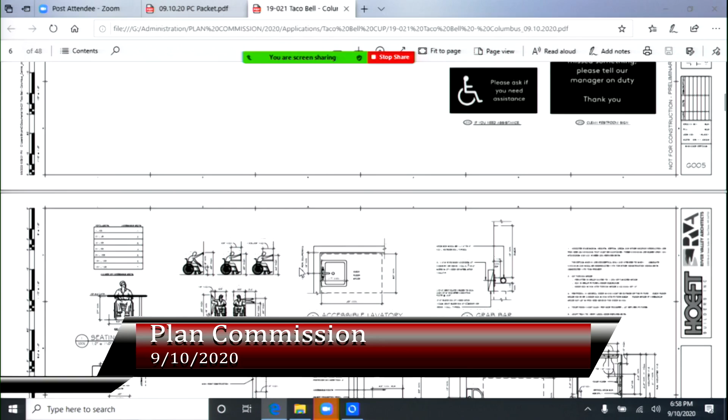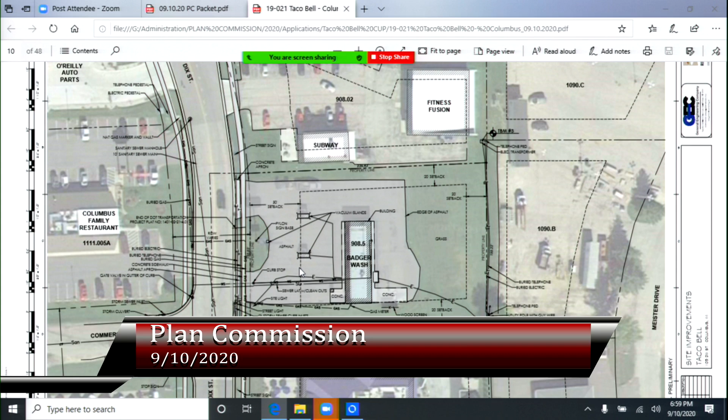There was some thought given to originally having it lined up with the family restaurant, but ultimately we figured it was best on the northern entrance, since Columbus Family Restaurant has been there, has been grandfathered, and has 3 access points. That would be something to look at if there were ever a project in there, maybe one of those access points would go away. But since they're on a corner lot, there are no issues right now. It's one of the few properties on this stretch that has 3 driveways. And the rate of ingress/egress there is different than for a drive-through type of thing. That's true.

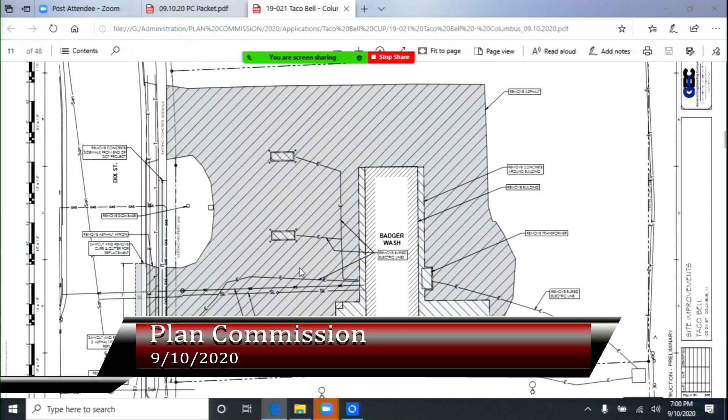This is also another current existing site. I think it shows where the utilities come in as well.

So this is the site plan that we have in front of us. You'll notice the 36s here, a right hand and a left hand out at the entrance. I've seen this kind of design more common nowadays. It shrinks it all and puts it into one driveway, but with the widths, as I said, it's 36 feet, and it's 36 at the property line.

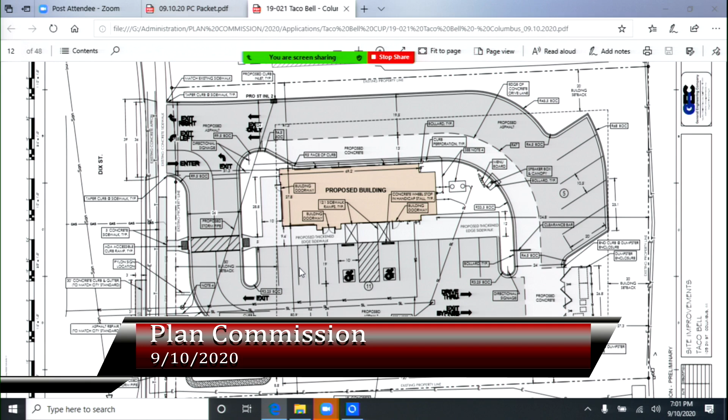The one thing to note is that Dix Street has an 80-foot right of way, so it's a little bit wider. Sorry, 70. It's wider than the normal right of way, and the property line technically doesn't start at the sidewalk, it's a little in from there.

They said there are 28 stalls, 2 of which are handicapped accessible. This meets the ADA requirements. They show their garbage refuse area in the back, and it's screened. Any questions on the site plan?

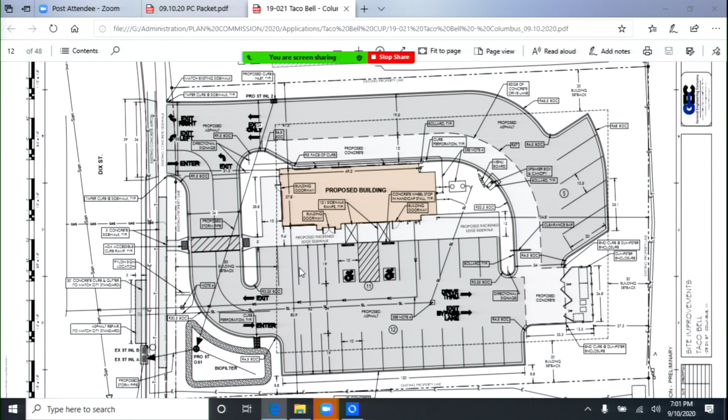They do have a dry biofilter retention area on the south side, and it's really to handle TSS and infiltration requirements, I believe. They noted that this site is small enough to get under the threshold governed by the state, since it's not an acre in size, so they don't have to address quantity, but that was addressed through the site plan review process to satisfy the city's code.

This is Brad at General Engineering. Just to clarify, even if we were over an acre, we would have to submit to the DNR and get approval, but because it's a redevelopment site, we would not necessarily have to meet infiltration or detention requirements for a redevelopment site. Right, you'd still have to meet TSS for total suspended solids removal, which we're already addressing. Yep, yep.

Matt, is there any note on here, as far as trash receptacles on the indoors and outdoors? Oh, you mean the actual trash receptacles for use of customers, like on the sidewalks? It does not show that. I don't know if that's normal to not show or what, but I was just curious.

I'll let Brian answer. Is that on one of the other pages? I've really only focused on those relevant to this conditional use, so some of the other items in the full set of plans, I haven't. On the interior, it talks about the trash receptacles, just not the exterior. I was curious.

On the exterior, we have that patio, and on sheet A900, which is the last sheet of the documents, there's a patio layout that shows the trash location, labeled T759 on that last page. So there's one out by that patio, kind of where that 10-foot mark is against the building. Thank you. What was the page number again? A900 would be the last page in all the documents.

If you don't have it, the PDF that I sent over just has a patio layout showing where the trash is, and that would be an exterior trash container. So facing Dix Street is the patio you're referring to? Yes. And is that the only exterior trash receptacle? Yeah, it's just generally shown in this area. I believe that's what they said, yes.

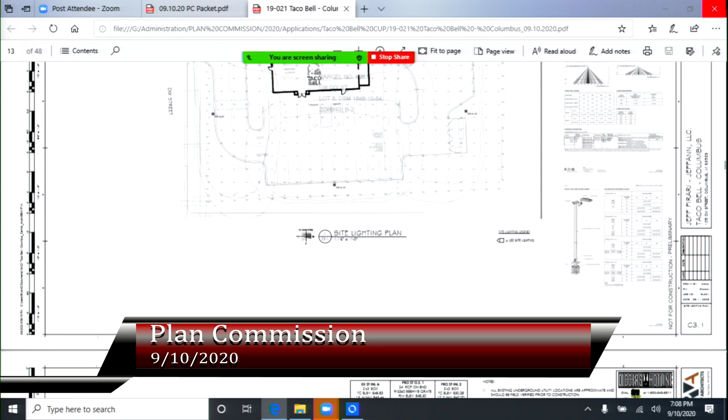I don't really have any other questions on the lighting plan.

Hey Matt, this is Brad Baston. On the lighting plan, if you guys are gonna look at shifting those a little bit, I would encourage you to look at the pedestrian conflict point at the road, just as the light seems to drop off from the inside corner, and the actual crosswalk seems to be fairly dark. So I'd encourage them to look at making sure that conflict point with the pedestrians is looked at carefully.

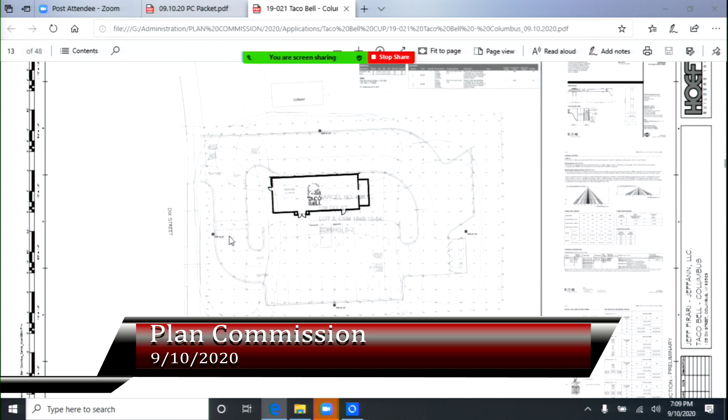Gotcha. Well, I think that was part of the reason why Jason wanted to see better lighting at that intersection as well, was the pedestrian. Right, it's far more important there than the north side of the building, or whatever.

I forget which side is north. The up side of the building. Yeah, it's much more important, that conflict point where the pedestrians are. It's noted, thank you.

All right, any other questions on the lighting plan? The next... that's not what I want.

This is the grading plan for the project right here. This is one that, looking at Jason's comments, I believe they have addressed. This is one where I think I'll have to defer to his comments and follow up with Jason to make sure that they've addressed items 1 through 8 in his letter dated September 1st.

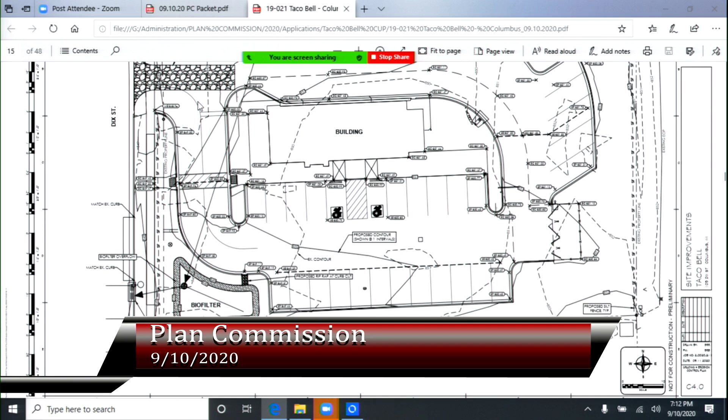I guess, Bryant, you can, if you want, talk a little bit about addressing these comments, or Brad. Sure, I can, and unfortunately when you're on the screen I can't see the comments. I have them up as a PDF, but I can't see them while sharing. You want to just go through them quickly? Oh, there they are, okay. No, I'll bring them up. I should have printed them, I'm sorry. No, it's okay.

So it's sheet C4.0 - the 6-inch diameter under drain in the bioretention, that's that line that comes out of the circle, out of the manhole, diagonally across the biofilter. You see the manhole, the one that goes kind of down and to the right? That's the 6-inch biofilter, and it's called out on the utility plan as a 6-inch ADS storm pipe. I think that issue was addressed.

Existing inlet on Dix - there's actually two inlets next to each other there, and we kind of confirmed again on the utility drawing, we have the pipe size, the invert elevation for existing inlet A, so we've kind of done that. There is a power pole nearby there, so I think we're not going to hit it, but we're not going to be very deep either - inlet A is only 3 feet deep. I just think the contractors that are digging may have to have some power company there kind of holding the poles because they're going to be right next to it, but we're only going to be 3 feet.

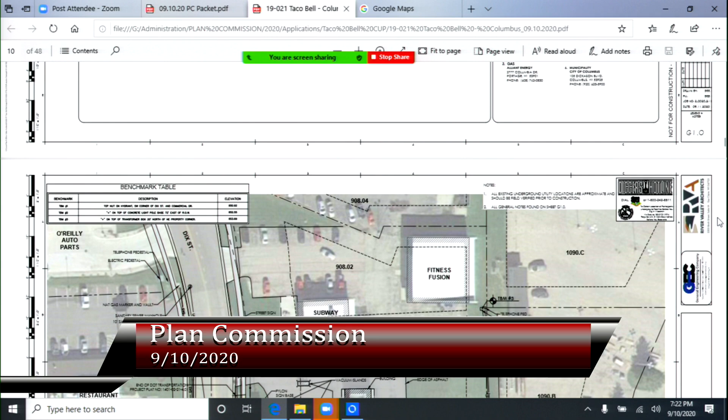So can the city make more requests in this regard? We could. Generally speaking, though, our code - some communities, and we're looking at it for when we update our zoning code, they have a point system to award for landscaping, to create a clearer way to evaluate what amount of landscaping is needed for a project, but we really don't have that. It ends up being a lot of times staff discretion. So with that, what did you have in mind?

My thought would be to plant shade trees, at least between Culver's and the Taco Bell on that line, to break up that sea of pavement. I know there would be a grass border, but there's nothing that breaks that up, so it starts to look more busy, whereas if they're broken up by a row of shade trees, I think that would make the area look nicer. You could have the same argument on the north side, but it's much tighter. On the south side, a row of shade trees looks nice and would provide shade for parking on that side, which a lot of people appreciate if they're eating in their cars or stopping. So it would be an advantage to the site, as well as enhance the view as you drive down the road - not just pavement all over, but more breakup with some natural features.

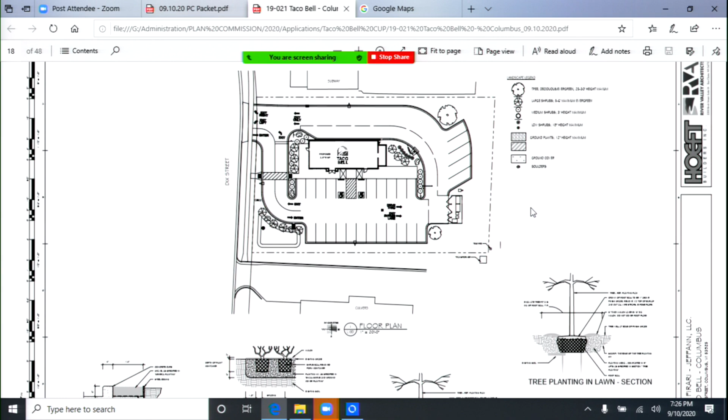Okay. Thank you, Matt. No problem.

Matt, were there any other plan sheets you wanted to share with us? Those were the ones applicable to the conditional use permit and that process.

Okay, committee members, I know we've made some comments on sheets as we went along. I'd like to make a couple of comments and then throw it back open to everybody. Number one, kind of getting off the plans, I'm pretty well satisfied that's been handled well by staff.

I noticed the difference in the plan of operation in the staff report versus what was written on their operation plan, and you said that is going to be modified. Yeah, after I got the plan of operation it didn't seem to add up, so I emailed Bryant and asked for clarification, and they gave it to me.

I'm going to back up and make a general statement. The reason this is here for conditional use is because it is a drive-through. So I appreciate everybody's comments, but I want to remind everybody that's really the primary reason. So things like traffic, drive-through places generating trash, things like that - as we think of our comments, let's keep focused on that particular aspect.

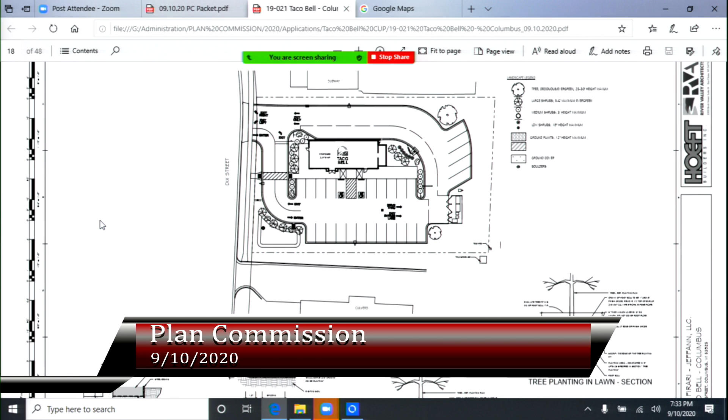It's the 10th line, it says operation of a fast food restaurant with a drive-through facility with outdoor display of vehicles for sale on the property. That's a little confusing. That would be because it was the template from Gates Automotive that I totally missed. So yeah, that should be struck. Nice catch. This was boilerplate that I'm going to be using in the future.

So thank you, because I could have recorded that. I would agree to strike that. Hopefully somebody would have caught that before it would have been recorded. But it's a team effort. Boilerplate stuff does save us the cost of having Paul redraft this every time. I'm going to have Paul review it before it gets recorded though.

Any other comments? Maybe this isn't even related, off topic, but what are the side yard setbacks and the back setback? It seems really tight, and I know Subway's tight, but what are the side setbacks? For parking lots included, you can be 5 feet off. The side and the rear are fine. The front yard setback in this district is 50, and they're 51, I think. So the setbacks are fine for this project.

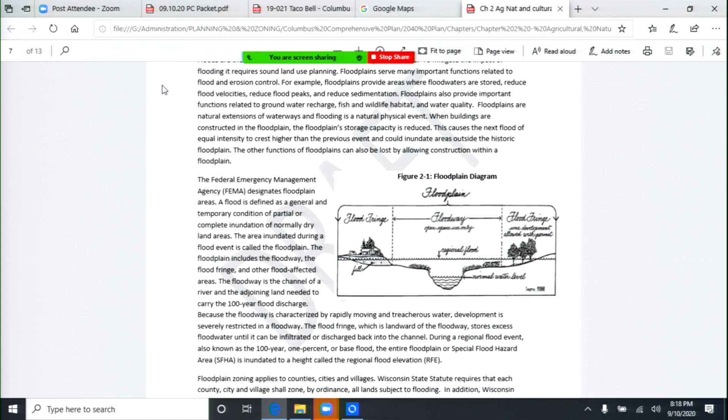It's something, obviously, in our community with the impact of FEMA and floodplain, that we really need to be cognizant of. At any point, if you have questions, feel free to stop me. Otherwise I'm just going to ramble through this.

Wetlands - here's some more information about wetlands provided through the DNR.

The threatened and endangered species - when you go onto the Natural Heritage Inventory database through DNR, you can find the local endangered, threatened, or special concern species at the town level. By town, technically it's the township range under the public land survey system, which happens to coincide with the town of Elba and the town of Columbus. They don't have it to the municipal or city level, but you can see three species and two different communities listed under the NHI.

The next item is environmentally sensitive areas. This is a requirement of the state statute where we look at the DNR's tracking system to track potentially contaminated sites. There are 6 open sites left and 103 that are closed. This doesn't mean they have every single site where there's potential contamination, so if we think there's still contamination at sites, we'll recommend people do a phase 1 and eventually probably a phase 2.